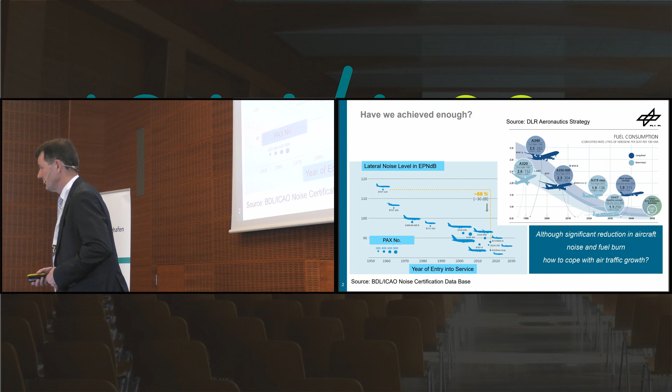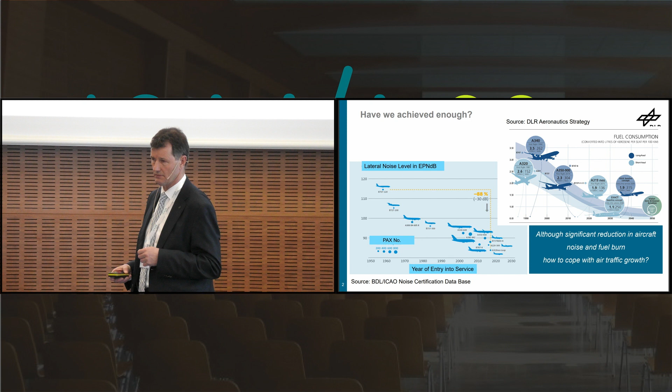Into the research strategy of DLR, and a lot of things have been mentioned before. Maybe I can be briefer with some of my slides, but I would like to give you a short insight why we do what and why we have always dealt with noise. It has never been the situation that noise was not dealt with at the expense of more activities in the area of CO2 reduction. That's not the case. Have we achieved enough? That's the question above. And I have selected a picture that our colleagues from the BDL have developed on the basis of the ICAO noise certification data.

Lars Enholf did that. That was in the area of one of the certification points, EPNdB, and he shows how in the past 60 years noise has drastically reduced with the increase of more modern aircraft. And the same is also true for fuel consumption. You see that on the right-hand side top. Here you can see fuel consumption per passenger and per 100 kilometers. So you can nicely compare that with ground-based transport.

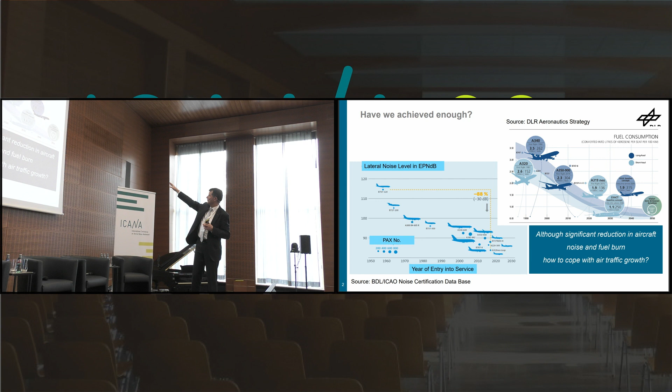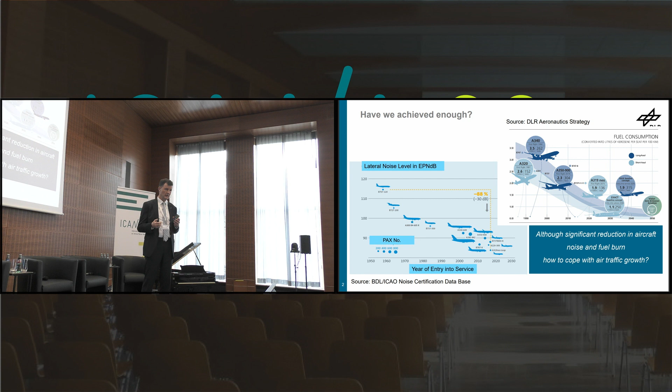And if you take a look at that today, that is the average value, 1.4 liters per passenger per 100 kilometers consumption. But that's not the end of the development. Some of the concepts that Professor Enghardt introduced are also found on the right-hand side here. That is the DLR research into most innovative configurations that at best have the two effects: flying more efficiently, less fuel consumption, and being more silent at the same time. You know that, but nevertheless, I would like to show that to you again.

If we take a look at the upper curve, and these are curves that are generally accepted. These are market forecasts of Airbus, Boeing, IATA, and others. And they all see an exponential growth for air traffic for the next decades. If we do everything that we have planned today, it will not be sufficient. Nevertheless, we have to come to this little point that says European Green Deal. So basically, the growth in front of us needs to be decoupled from CO2 emissions.

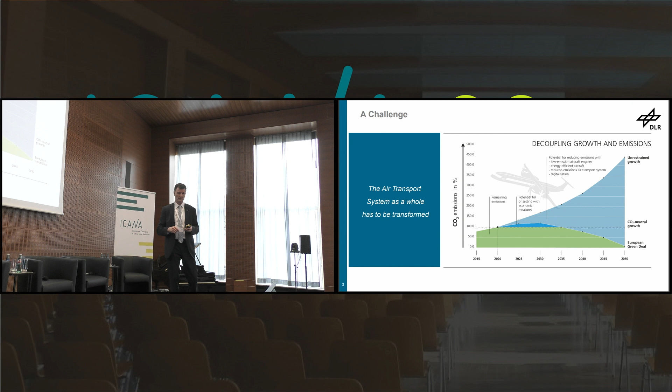So we have to clearly do more than just saying, all right, we are here now in 2023 and we only see the traffic volume of today. As a matter of fact, we forecast to the second half of this century, looking into passenger numbers and traffic volume, and then use our best possible technologies and processes and design them accordingly.

It's important that we not only do the one thing and leave the other, that is CO2 or noise. No, we also want to include noise, and we would like to have an integral approach. On the left-hand side, you see a picture that I took from the ICAO.

This is the noise influence area in square kilometers as a mean value across 315 airports, presented in a noise metric DNL, day-night average, DNL. And it's taken often to really determine the hearing perception of a person on the ground.

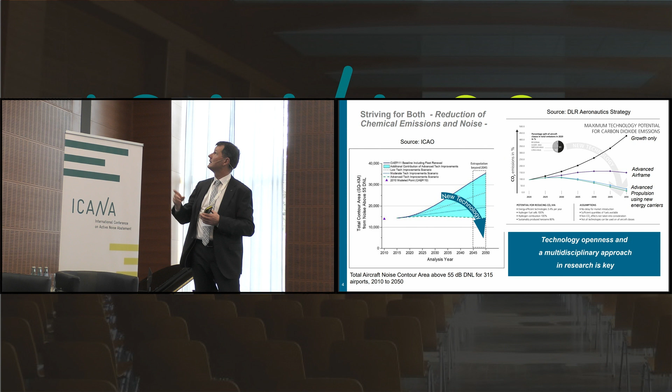And you can see how this noise, the noise carpet, so to speak, and the size of this noise carpet becomes larger and larger, and you can only counteract this when using innovative technologies. That's what is meant here, and the same is true for CO2 and non-CO2 emissions. Here, we need to improve aircraft configurations.

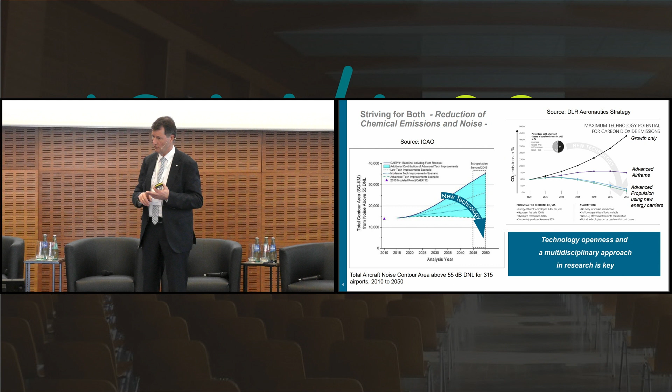We need to improve the processes and the operations of the future, modern engines, modern airframes, and also the use of alternative sources of energy, which includes SAF, hydrogen, and electrical energy, purely electrical energy. For that, we need to take a multidisciplinary approach.

Now, we have developed a strategy going together with that in the DLR. You can download that. It says, shaping the future of aviation, and it has 4 pillars. And first of all, we deal with the energy efficient, the low emission propulsion, and we are open with respect to technologies. We look into aircraft of different sizes and then assess what the best possible solution would be, engine configuration, propulsion concept, etc.

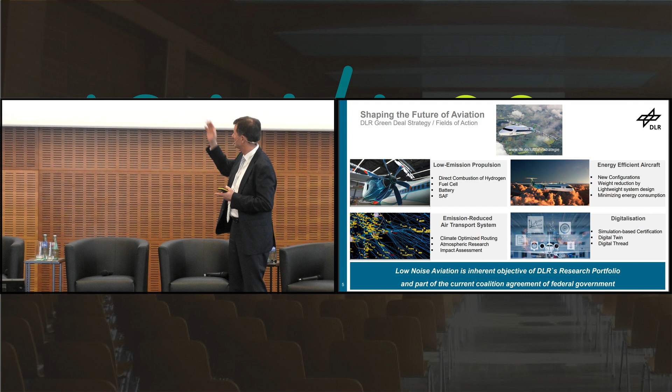And here we would look into different energy carriers, like hydrogen, together with fuel cells, or direct combustion of hydrogen, or sustainable fuels, bio-based fuels, or very soon synthetic fuels. And this in all different combinations of propulsions.

On the right-hand side top, you see the other side of it. That's the airframe. Here we look into new configurations. We check how the energy consumption of the plane as such can be reduced drastically till 2050. We would like to reduce it by half with lightweight design, better aerodynamics, better configuration, and also the question whether we always have to fly that fast and that high as we do today, or whether we can save much more energy with this. And the first project results point to a very high potential here as well.

Digitization, well, I don't want to talk about that in detail. I think that has become a backbone and allows us in this application to much earlier develop and look at radical concepts, as Professor Engelhardt showed it. With the computer system, you can really present that very quickly and easily, and in the early phase, you don't need to carry out a comprehensive experiment.

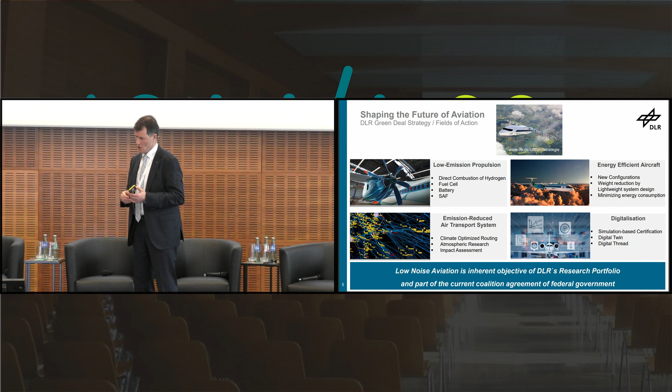And then I added another sentence here. As a matter of fact, low noise aviation has become an inherent objective of politics again. You have it in the coalition treaty of the present government, and we are really happy to see that. So it will be eligible for subsidies.

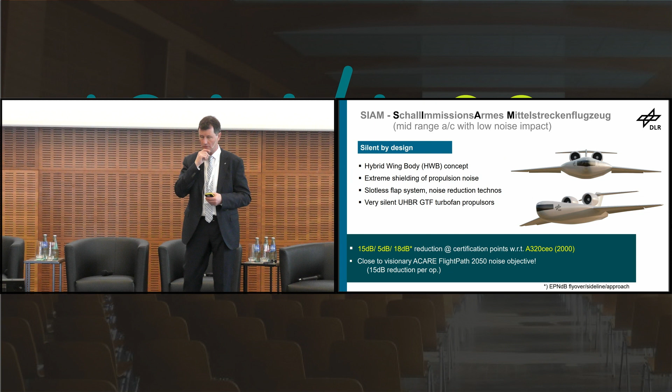Let me mention a few more examples. Many examples have been presented already. Let me show you how you can configure an aircraft to be more silent. This is an ongoing project of the DLR, SIAM, emission-reduced mid-range aircraft. Looks different. It's a hybrid wing body, as we call it.

It's not a new configuration. We have had it since after the Second World War already, and there has been a lot of research into such a configuration. And Mr. Engelhardt said, okay, such a configuration would be appropriate, having the engines not at the underbody, but rather at the top. So to have the shielding effects and also maybe embed the engines, the propulsion, making sure that further advantages can be generated.

With this configuration, they use propulsion systems that were a further development of the fan, and also in the high-lift system, which has a lot of gaps and slats that also create a lot of noise. So they rather use gapless systems.

They did all this and they found, great, in yellow you see the levels that could be reduced at the 3 certification points compared to an A320 standard 2000, which is the aircraft that is mainly used nowadays. So here you would really be able to reduce a lot, reaching the goals of the ACARE Flightpath 2050.

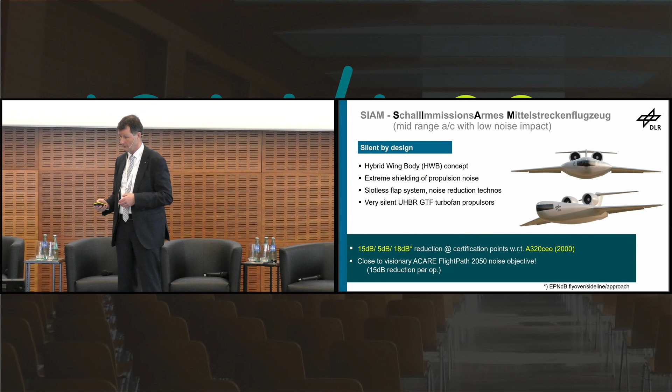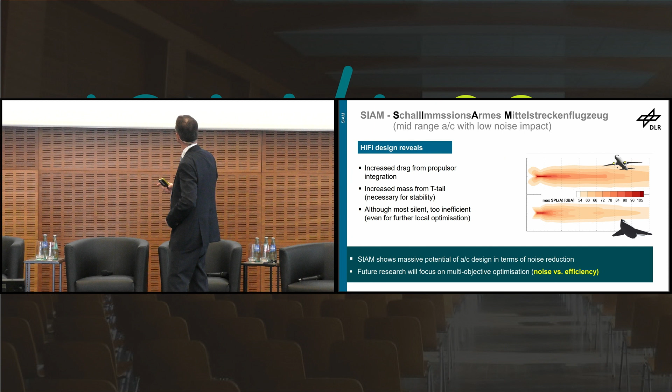But now the but comes into play. We heard about that before. You see in this picture how such a configuration behaves compared to a standard configuration with the noise contour, the noise carpet, that is level and propagation.

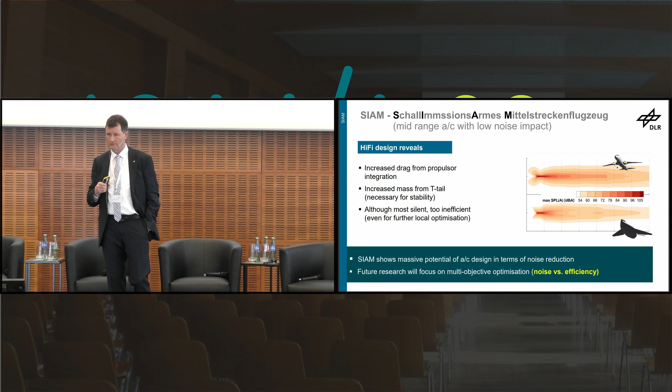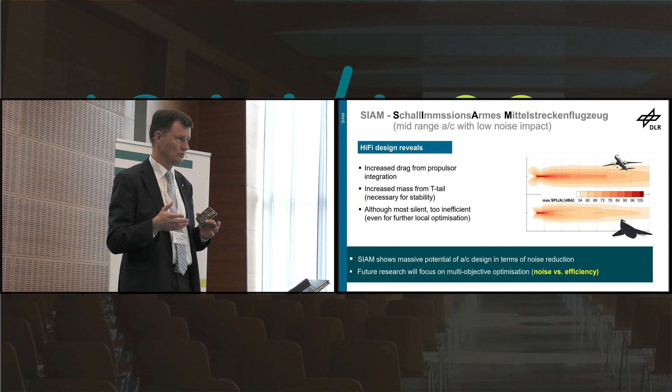If you take the very precise aerodynamic methods and look at it in a multidisciplinary approach, you see that it has its price, which means, for example, that the arrangement of the engines might produce additional drag, add more weight. You have to balance that and compensate for that. You don't get it for nothing. Aerodynamics, respectively mechanics, needs to contribute as well.

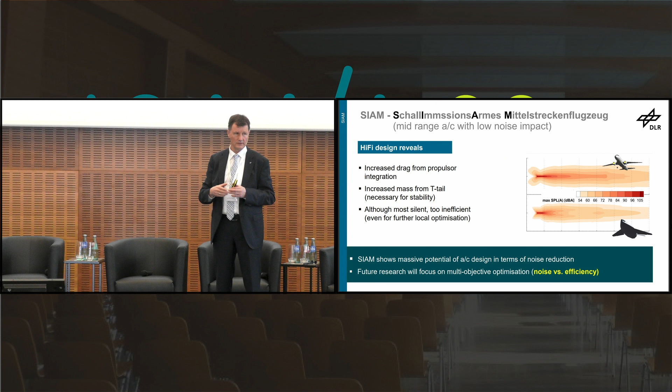So what we have learned, the project is still ongoing. We have learned that right from the beginning, as it says down here, we need to have a multi-objective optimization. And here noise requirements should be an initial parameter considered right from the beginning.

Now, briefly, a few words about the airframe noise research. I don't know whether the colleagues have talked about that before, but we are quite proud of the LNATRA project. In the years 2016 to 21, it was carried out with a lot of efforts. It was done together with the European project AFLoNext, which we coupled and carried out simultaneously.

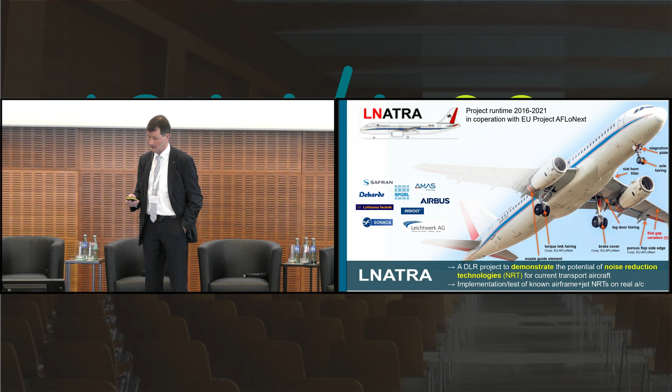And the objective of LNATRA was to look at an air traffic aircraft, and here all noise related measures shall be first developed and then proven in real flight operation, and then we can see how far we get with the goal that we can retrofit the existing fleet. These are measures that were flown here for future aircraft, of course, but here the goal was first of all to do that for the existing fleet, to see what airlines could do in terms of retrofitting.

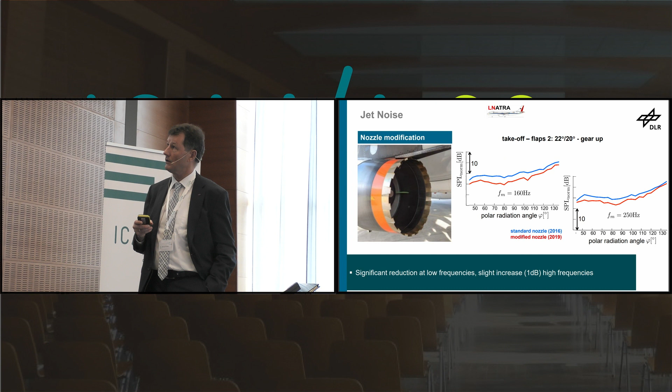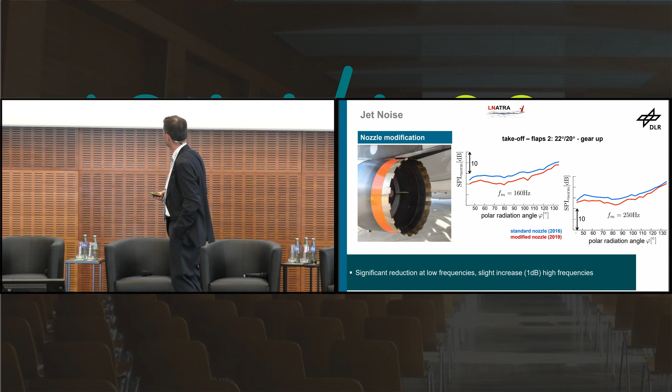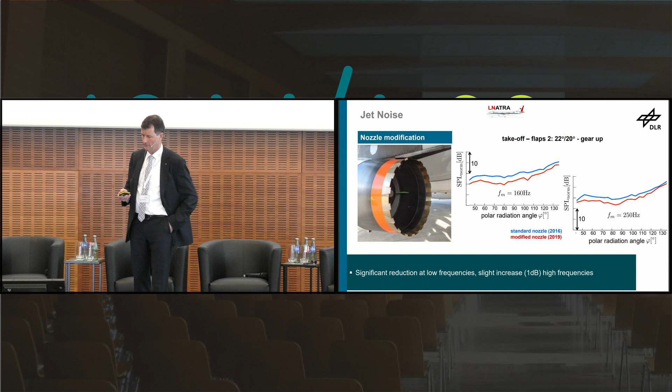And here, just a few examples, like they modified the outlet of the engine, the nozzle, and you can see the nozzle outlet, which is more hatched, and with mixing zones of the exhaust flow, we have a lower jet noise. And there are two examples of two frequency ranges in polar radiation angle, and with such a geometrical arrangement of the nozzles, we can really reduce noise and prove it. So we proved it in the real test.

Then they looked into the landing gear a lot. The landing gear is important for approach. In addition to the fuselage and airframe, it's the second largest source of noise, so it really makes sense to look into the landing gear as well. And you see that many components of the landing gear have been cladded with dampening material, with grids and what have you, and aerodynamic fairings, and that was a great success.

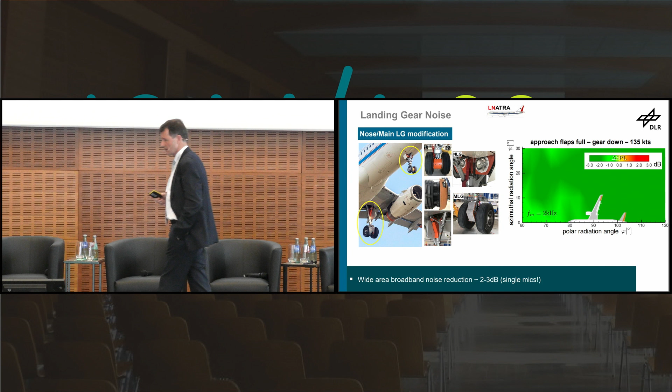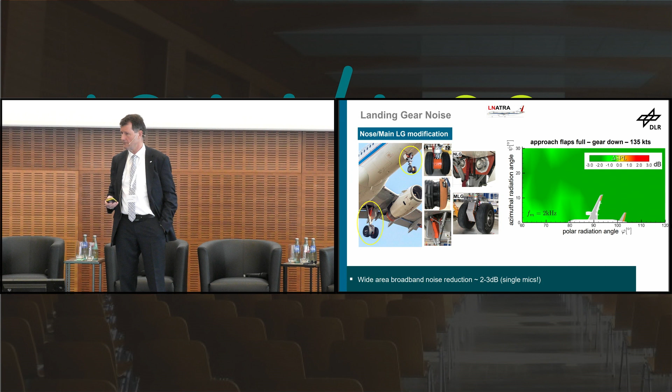Here you see it in the 2 kHz frequency range. Gear down, the influence on the sound pressure with an approach operation of an A320. Landing gear has been set, typical approach velocity, and you see that you could retrofit this easily, and thus the landing gear noise could be reduced.

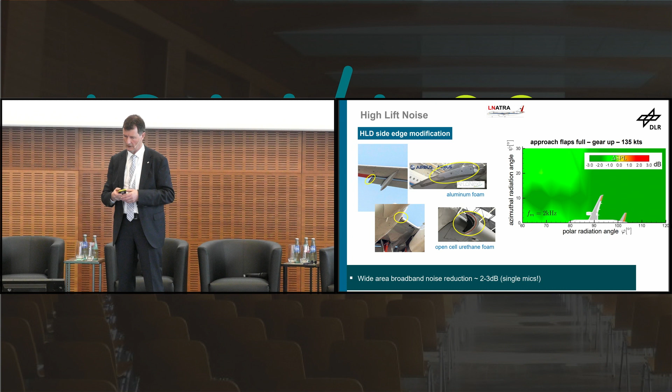Also here, in the flight test, we saw that you can reach a lot with such methods, and on the right-hand side you can see the measurements. Here in a very broad frequency range, 2 to 3 dB reduction is possible.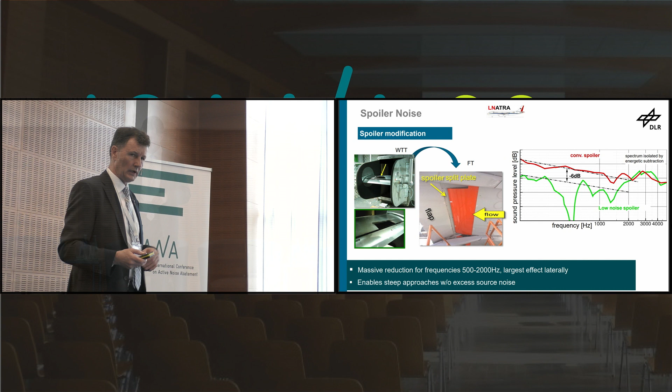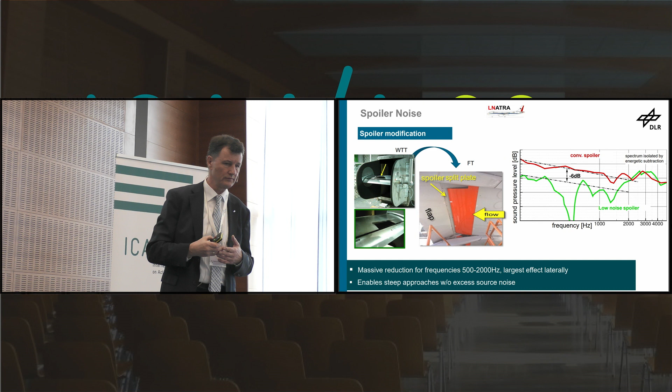For the spoiler, also here we carried out some measures. You see here for the approach, if you open the spoiler, or if you open it anyways, it would open up, so you can directly look from top down, and here easily noise flow goes through, and therefore they used so-called splitter plates. So when opening the spoiler, the noise flow to the ground was prevented. That was an important factor of influence.

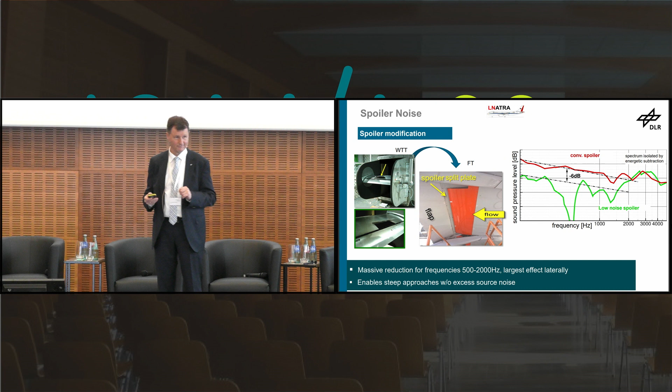And on the right-hand side, you see the measurement for the sound pressure across a large frequency. You could reduce a lot, but let me tell you right now, it was a big interference for the aircraft manufacturer. They said, forget about that.

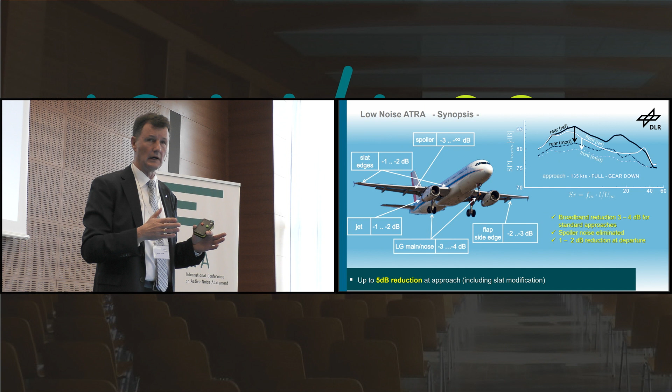Finally, all the measures that were tested in flight that really offered noise reductions are presented here. There was an observer behind and in front of the approaching plane and how this person perceived that. And what we consider here are the black and the white curves. And you see across the Strouhal number,

the sound pressure level was reduced nicely, and you can claim here that the total package, LNATRA, including other activities that were pre-tested and pre-drafted but could not be used in flight for several reasons, could offer a package of noise reduction of about 5 dB. And with a fleet, with a single A machine, you could do it.

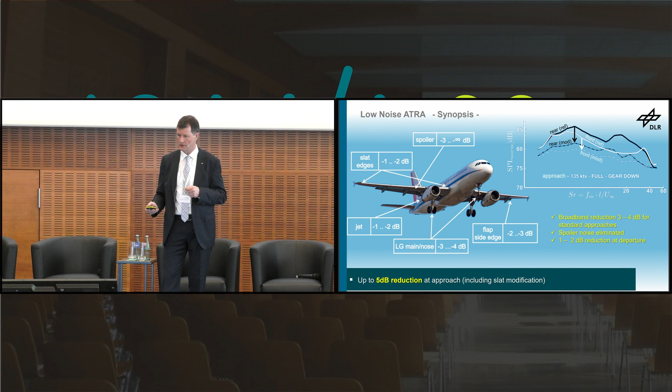Acoustical methods and tools. I briefly want to talk about this. You see, all these things need to be measured, not only theoretically, numerically, but also in the real experiment. And for that purpose, driven by aerodynamics, we want to measure aircraft in wind tunnels, geometrically and also in terms of flow mechanics. So they should be as close as possible to the real model. And acoustic experts have developed options here. That is part of the walls of the wind tunnels.

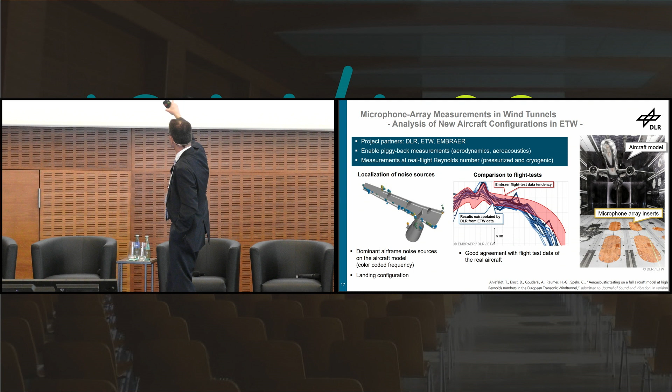They have the so-called arrays that work with correlation technologies, and they can measure sources of noise at the aircraft, and you can localize it highly precisely, and also the volume can be determined precisely. You see this experiment on the left-hand side in the European Transonic Wind Tunnel. That's an Embraer pattern in red. You see what they measured during the flight compared to the wind tunnel. And you can see the sources of noise and the levels really coincide very well.

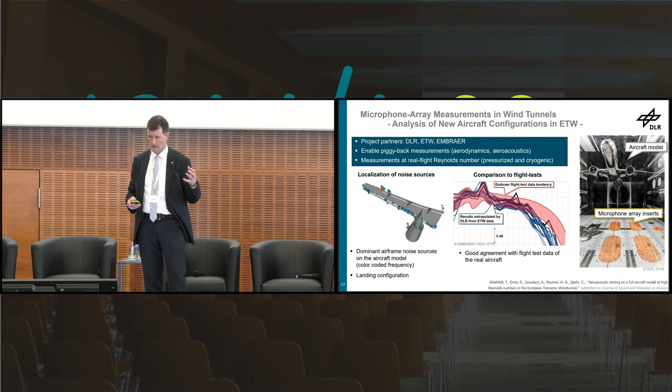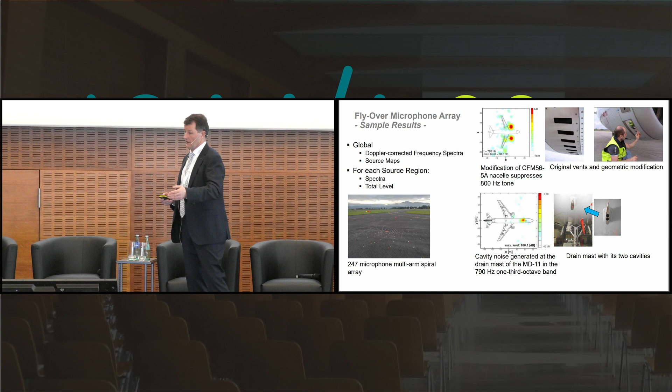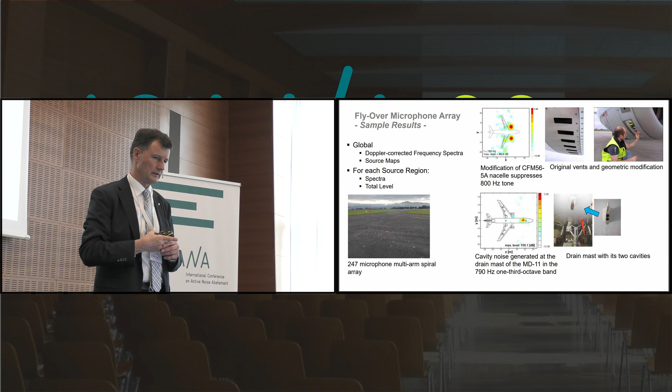So already in the wind tunnel, you can determine from the source of a noise where sound is propagated and where we have to interfere. And that goes further into the flyover experiment. Here the DLR, together with many partners, can test at airports with microphone arrays arranged in a spiral shape here.

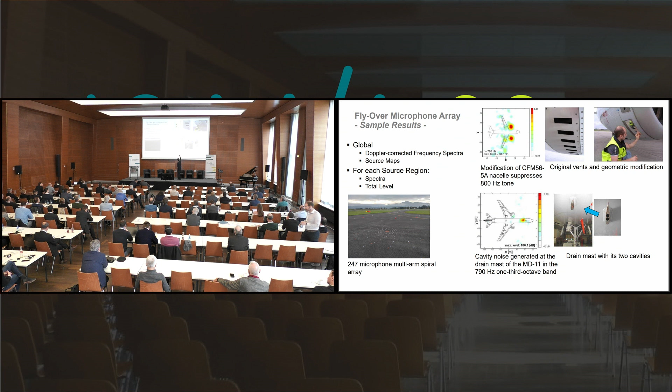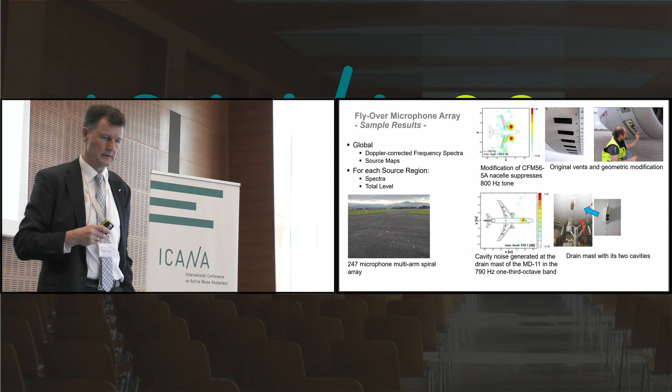And with that, sources, as you see at the top, like inlets and outlets of engines, can be localized precisely. Often they are the cause of tonal components. Or down here, a cavity of a drain mast that could be exactly identified, and countermeasures could be developed. I need not tell you more about this. Lars Enghardt mentioned that before.

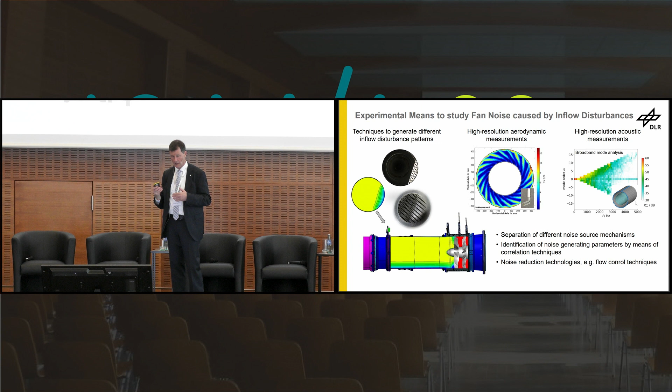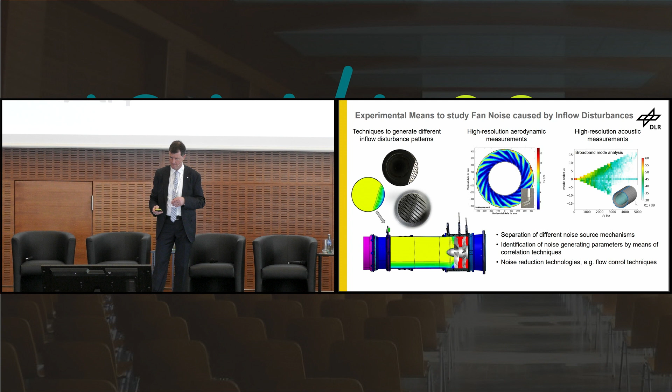There are other test rigs. The craft was mentioned before. Maybe I want to give you only a hint. There is a possibility to use inlet grids that can generate inflow disturbance patterns, and measure the influence on the fan compressor. So it's the high-resolution aerodynamic measurement and also high-resolution acoustic measurement that really determine the flow situation and disturbances, how they would impact the noise development.

In a nutshell, last sentence, yes, the DLR has always been active in noise research, and well, we do that from the source to the recipient.